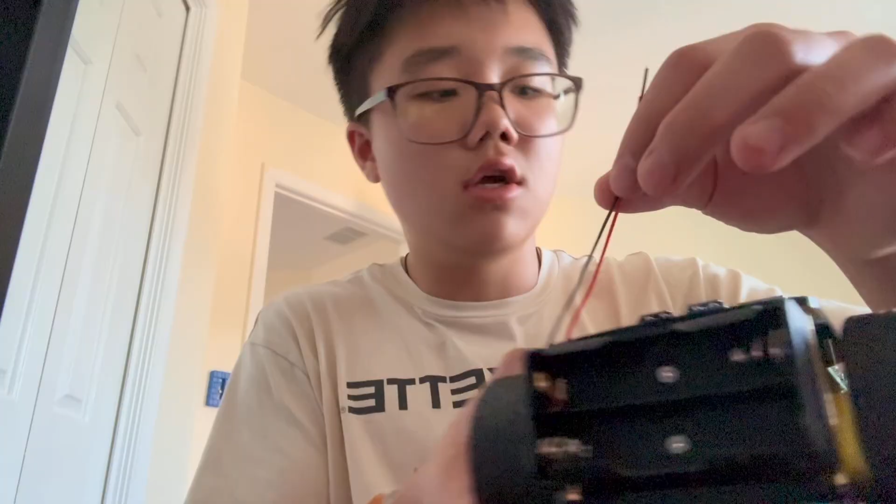Alright guys, so moving on from our last video, I have to attach the two wires from the battery holder to the motor driver, but as you can see, it's too short. So what I'm going to do is unscrew the motor driver again, so I can get into this little blue terminal block in there. And I'm going to use these Dupont wires I got to connect them. And that should be enough. Also, I'm going to zip tie them at the end, so they don't dangle around everywhere.

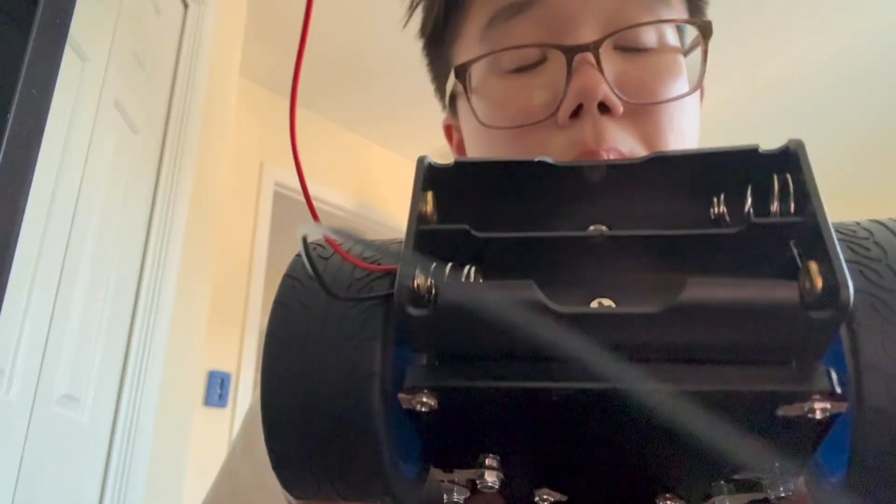And for the batteries, I didn't buy them yet, but I'm going to be using the 18650 button top batteries, and make sure they're at least like 2000 milliamp hours. If it's like 9,000 or something, that's probably fake. You shouldn't buy it. But yeah, I'm just gonna install it right now.

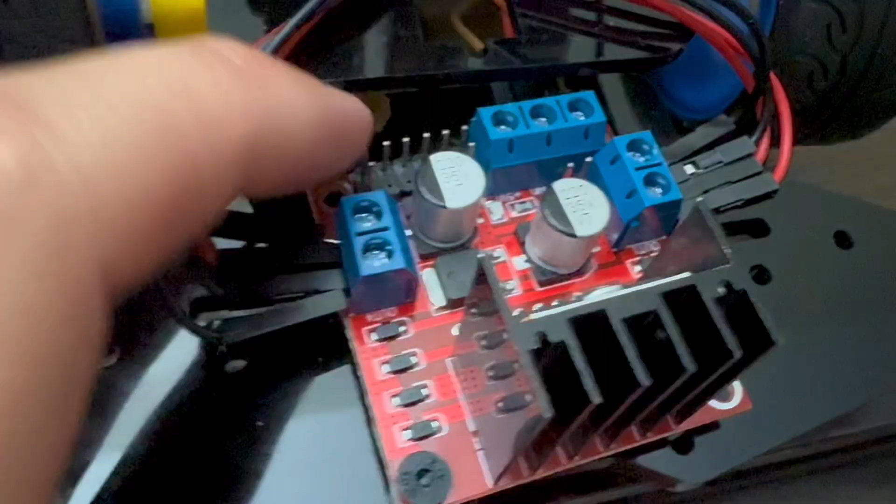All right. So as you can see, let's get a better look. Can't really see it, but I have successfully attached the wires to the motor driver. I used male to female Dupont wires to extend these two battery wires all the way over here. Now this was a lot harder than expected. It took me like an hour because I had to first remove the computer, then remove the second layer so we can get around it, and that kind of bent the wires and stuff. So it's kind of wacky right now.

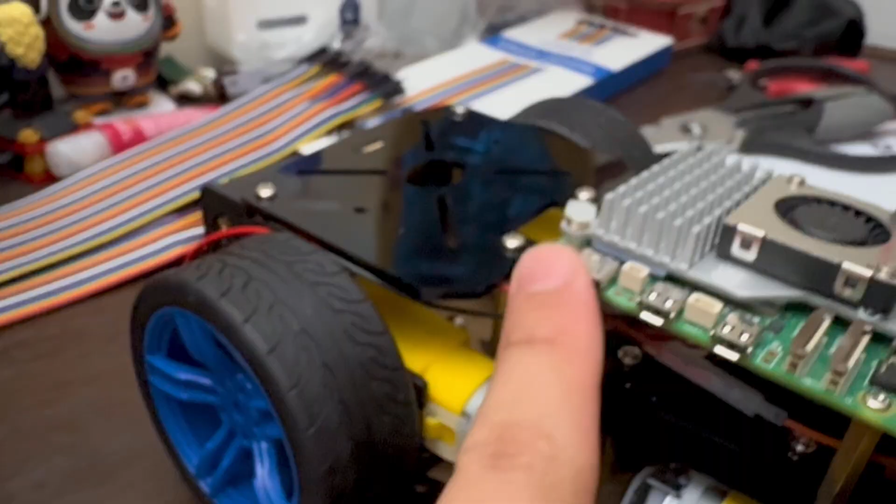I also reoriented the computer. As you can see, the USB-C port is right here, and I'm gonna put my Anker battery pack back here somewhere, so that way it'll be easier. So that's it basically.

All right, I forgot to record, but I did the control wires for the Pi. Basically, I just ripped 4 female to female wires from this guy over here. I didn't do one at a time, I just ripped all 4 off, so it's still connected, so it's more organized. And I plugged them into the pins. There we go. I plugged in the middle pins. So there's 6 pins. You just place all 4 of them in the middle, and then make sure you know what color it is.

And as you can see, the yellow travels up all the way to, let's see, right over here. I think it's like pin 13 or something. I forget. If you look right down there. And the orange has to be right next to it. The red is right next to the yellow. So the orange is the only one on the outer row.

And the brown, my brown was over here. It travels up all the way. Skip a pin. That's just an empty ground pin apparently. And you plug it right next there. And that should be good. So I'm going to get some zip ties and tie this all together so it looks more organized. All right, I'll be back.

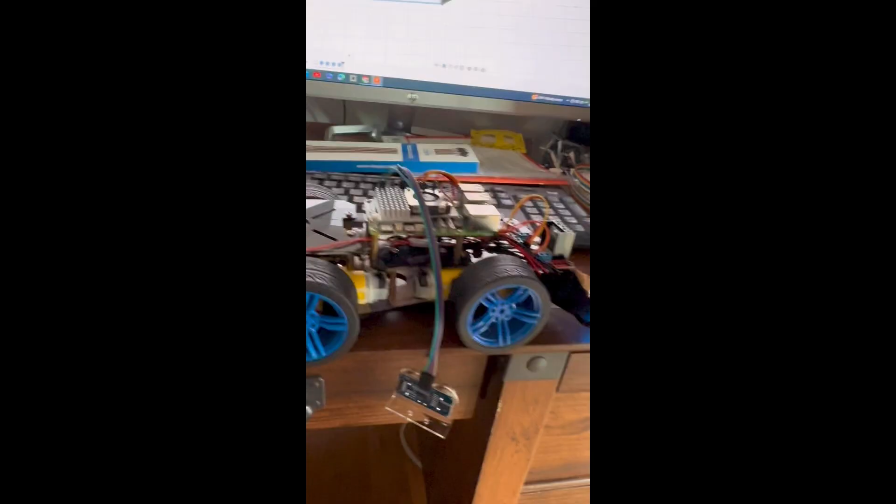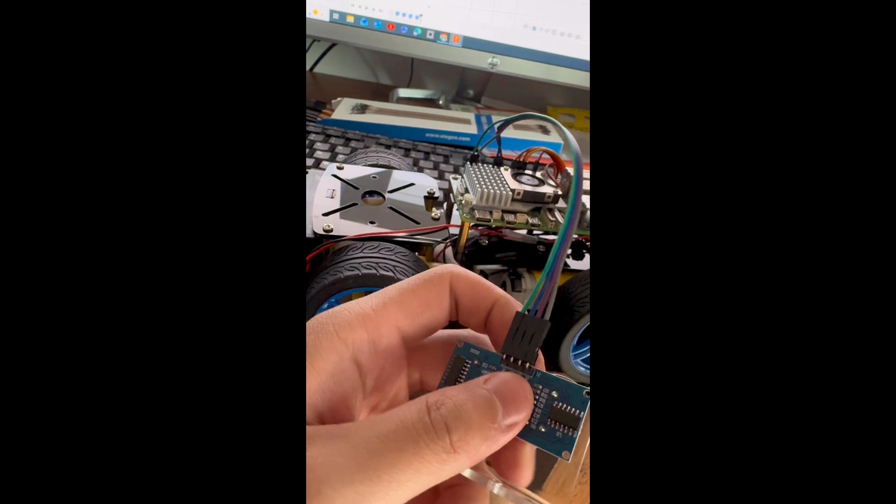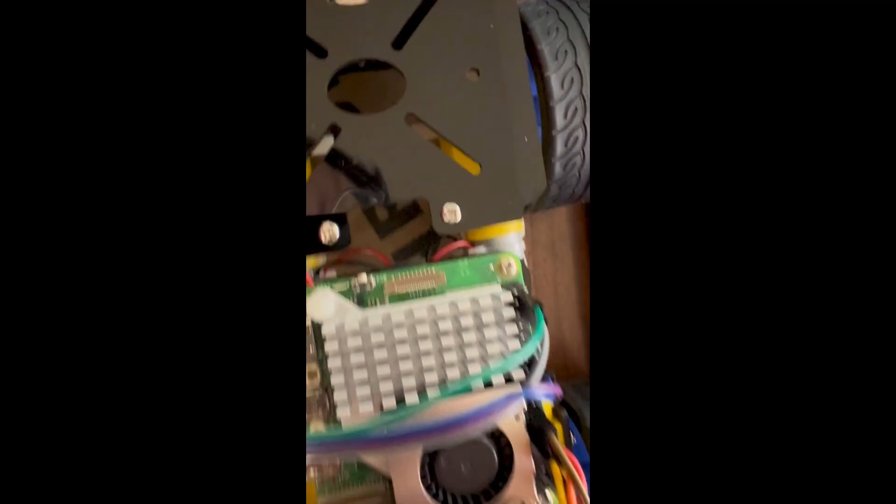Now, when I tested the screen out, the keyboard was kind of finicky. It was kind of weird. So I found a loophole for that, which was to use, let's take a look here. That's just the chassis. RealVNC, I believe it's called. So what this does basically is it screen mirrors my screen to my phone or my computer. So I'm gonna run some testing scripts, see if it works or not. Also run some for the computer as well. The batteries haven't come in yet, so let's wait for that.

Alrighty, so I just made a prototype for the front end of the robot. Right over here. I just have these plugged in right now. Don't worry about them, they're just for reference. But I made the front end for this thing to cover it up, so I can attach my sensors and camera mount. Currently, it is printing, as you can see. And let's take a look at my file on Fusion. Don't worry about that, that's just my Amazon thing. All right, here it is. Take a look.

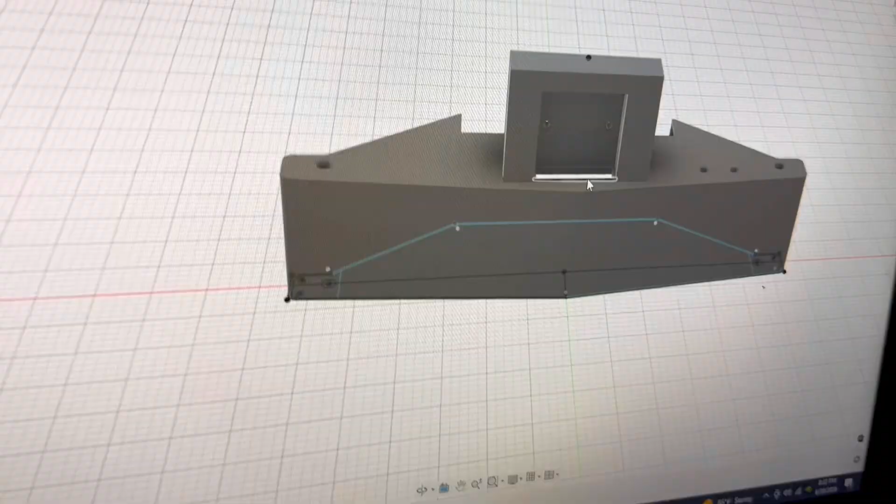Right over here, down there, the ribbon should come up and attach to the camera over here. Now this is not, of course, very ergonomic, this is just like a prototype, so I just kind of made something up. This should cover the front end. Let me move around to the back. Back here, I should add bolts, and then here it's just open because it's like 2 layers down there, so it will fit.

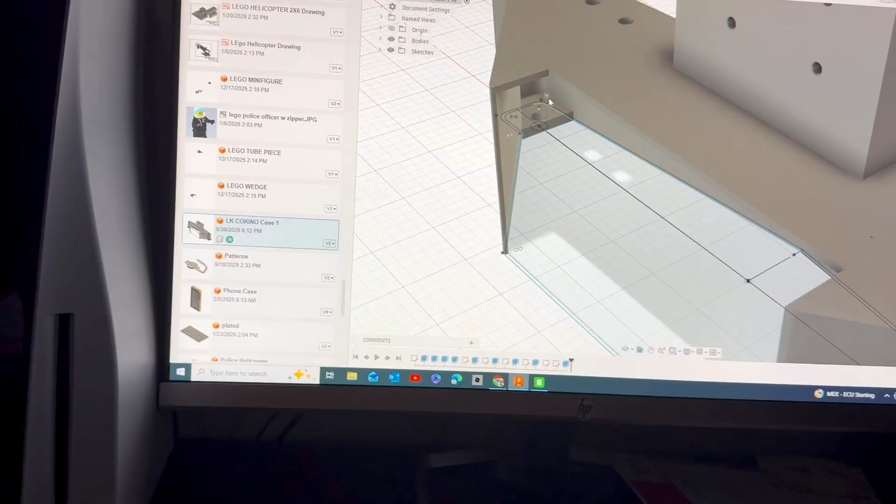And if you look, I don't know if you can see it, but if you look down there, see that hole? I matched it with the hole on the robot, so it should bolt in. It's currently printing. That was the file. There's a lot of support, so I guess I should be careful of that. So I'm just gonna let it finish printing and see if it fits or not.

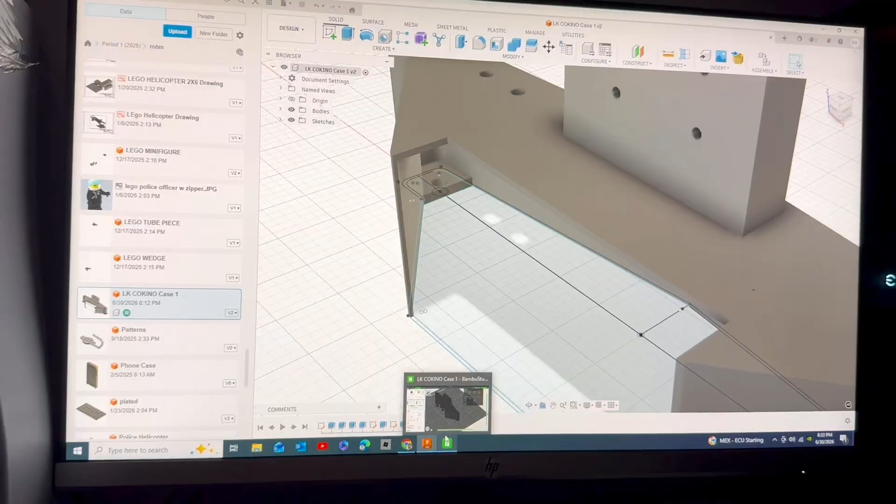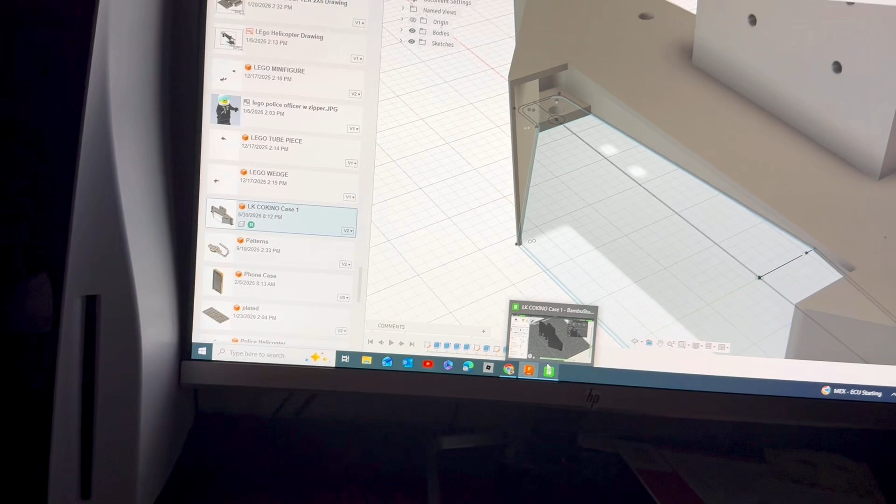I know I'm kind of disorganized right now, but I'm trying to get what I can done first because I don't have the batteries, and that's really inconvenient for me. I could test the code to see if the wires work or not, but the phone is kind of weird with it, and I can't download it on this computer for some reason, so I have to try it on another computer, and I don't have that computer right now. But I'll be back when this is done, and we'll see if it works or not. All right.